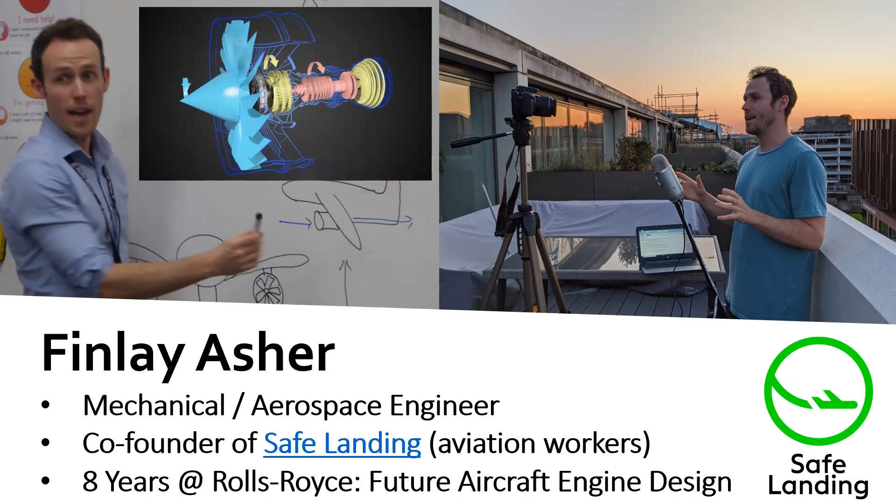To start with me, I'm Finlay, a mechanical and aerospace engineer. I've co-founded this group called Safe Landing, for aviation workers. Before that, I spent about 8 years working at Rolls-Royce on future aircraft engine design, so I've got a background on the technical aspects of what's required for better efficiency.

Started off on this first flying test bed of a carbon fiber fan blade engine at Rolls-Royce, and that's me at the front there with the engine on the test bed for the first time.

I then moved on to architecting the next generation of aircraft engines - an even bigger, really high bypass ratio ultrafan engine with a gearbox in it. That was meant to go to test in 2020 when I first worked on it. It's now on the test bed in 2023, and it still hasn't had its first run. That shows how technology can get delayed by quite a few years in aviation, despite our best plans.

I've also worked on future concepts. This is where airframers like Airbus or Boeing come to the aircraft engine manufacturer and say, we're designing a new program, a new airframe concept for 10, 15, 20 years time. We want engine manufacturers to develop concepts with us and produce bids for these future concept aircraft. I was in that job.

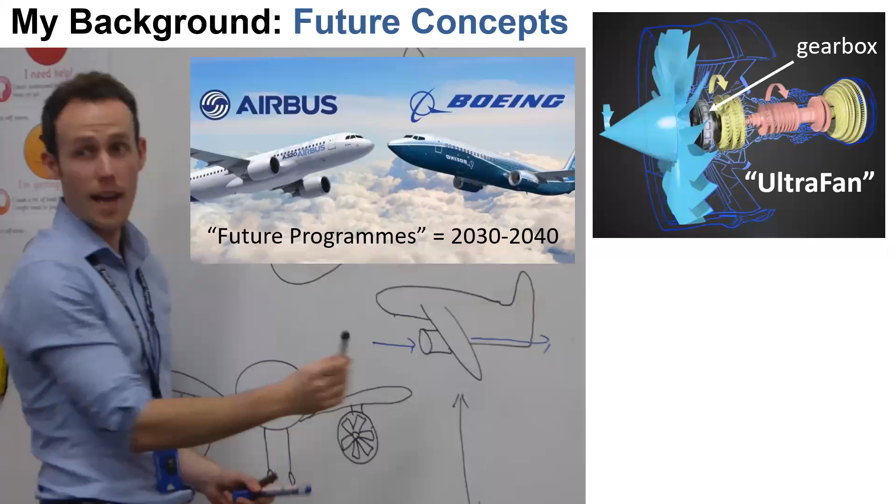Part of that was looking at the ultrafan, this very high bypass ratio engine with a gearbox in the middle that enables a really large fan and a really small turbine that spins a lot faster than the fan.

I was also looking at variable pitch fan blades - optimizing the angle of attack of all the fan blades rather than having a static set. This means you can really optimize a big bypass ratio engine for the difference between sea level and cruise, and also descent and climb. You can have an optimum geometry which changes your fan pressure ratio and enables larger bypass ratios, and can potentially remove the thrust reverser.

So I've worked on this kind of technology. What's interesting with the variable pitch fan is Rolls-Royce literally worked on this in the 1980s and haven't worked on it since.

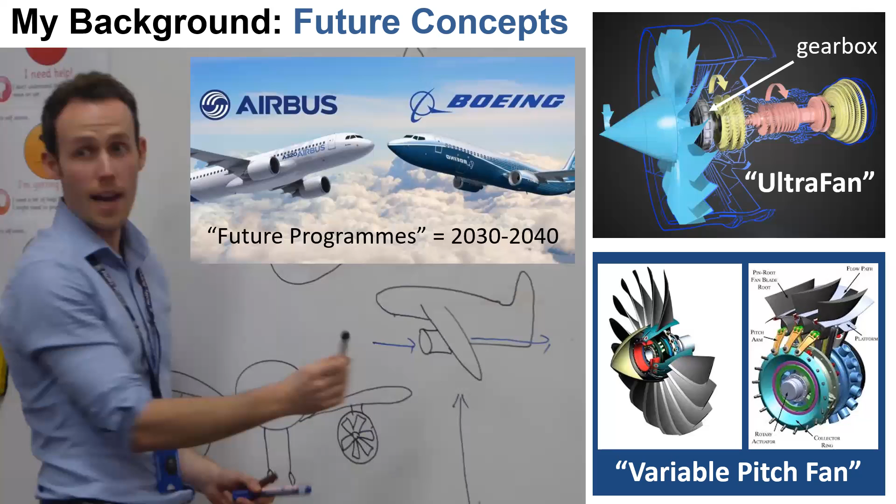And so why aren't we working on technology like that? Because there really wasn't that much resource going towards these advanced, more radical future concepts.

Now, a new engine development, a new aircraft development takes at least 15 years. And this is also not a radical concept, this is a relatively incremental improvement aircraft concept. So it takes about 2 to 3 years to architect it, 2 to 3 years to

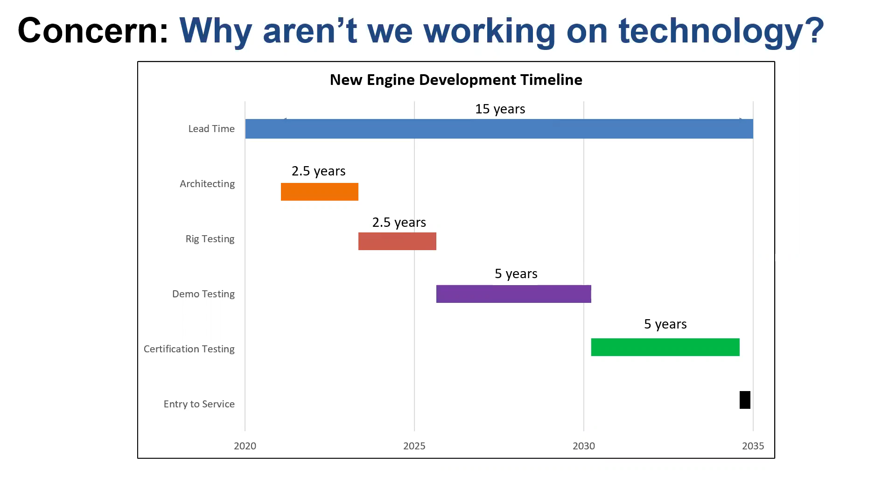do the rig testing of individual sub-elements of the system. Then you do about 5 years of demonstrator testing, trying, probably breaking and failing things before you get to your final design. And then once you have that, you take about 5 years to do all the certification testing, bird testing, water and ice, fan blade off, all of the performance testing, all of the life cycle testing takes about 5 years. So at the end of that, you're well past 15 years easily.

So the climate and ecological emergency is a this-decade issue. We could literally blow our budget for 1.5 degrees C in the next 10 years. So we don't have time even to do this. We should really be working on this as rapidly as possible, trying to minimize this time to get some new concepts in service, but we're not.

So why not? What I kind of realized as well is that, to go to the next step change of aircraft performance, you go to something called the open rotor. That gives you a significant step change, maybe like 20, 30% of fuel burn. It enables a really high bypass ratio, which is more aerodynamically efficient.

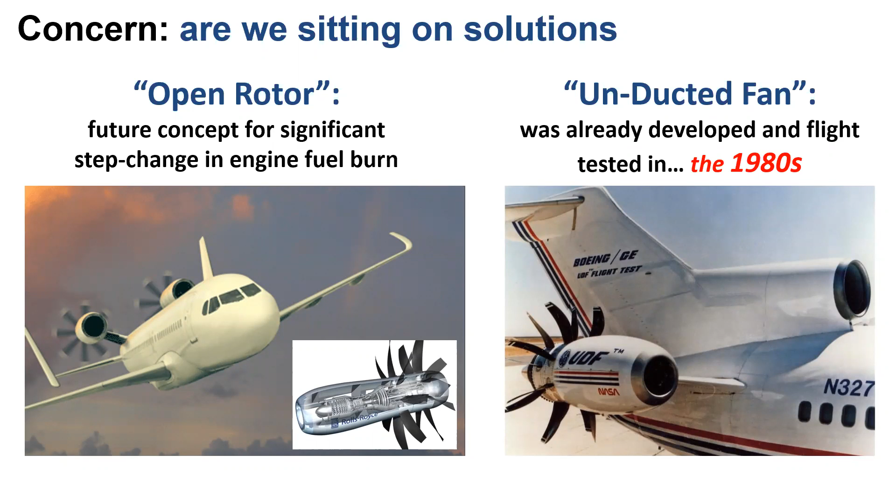But this concept has flown in the 1980s. It was developed and it's flown, and then it was discontinued in the 1990s. So why was that? Partly it's because there were technical challenges to do with noise and to do with the fan blade off, but those are solvable, right? And we're working on them again now.

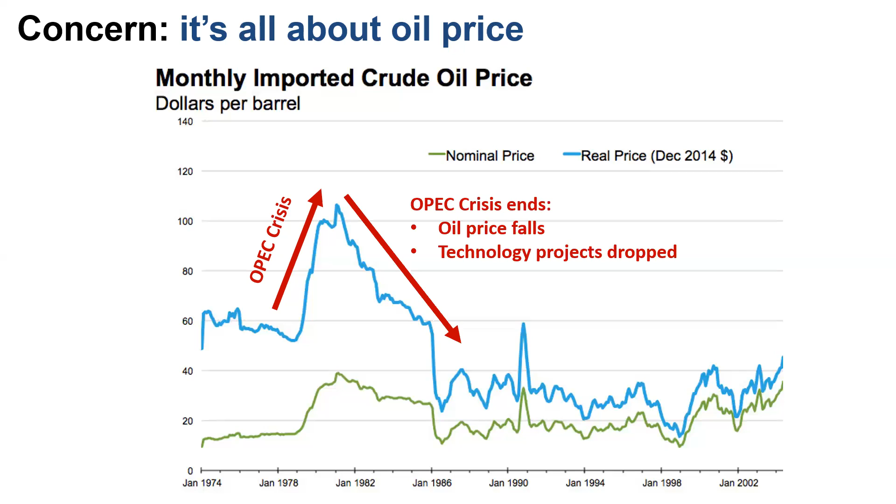The big thing was that in the 1970s, 1980s, there was something called the OPEC oil crisis, where lots of countries in the Middle East conspired to reduce the production of oil, and this sent the oil price really high. And it meant that lots of things happened, like in the US there was a speed limit on the roads, and there was suddenly development of wind turbines and solar panels, and we were developing these radical aircraft concepts. What then happened across the 1980s was the crisis ended, the oil price fell, and a lot of these technology projects were dropped. So you can see a low oil price really hinders innovation.

Then what happened in the early 2000s is climate change got back on the political agenda. We had Al Gore going to get into the US presidential election, talking about climate change as a really big issue. And that's when Airbus began their hydrogen studies in the early 2000s, which was kind of interesting. So 10 years later, Airbus had studied hydrogen aircraft for 10 years and developed this thing called the cryoplane. And in 2010, they announced: we're dropping it, too many technical challenges, it's not going to work, and we're going to just focus on scaling biofuels for the next decade, which didn't really happen either.

And also in 2020, Airbus were very keen on COVID bailout money and really wanted to show that they were going to do something sustainable to justify all of that public money being spent. So yeah, I think this is really crucial: environmental activism. In mid-2019, in the UK, Extinction Rebellion took to the streets and shut a lot of streets down in London. And suddenly all of the papers were talking about this. The UK government declared a climate emergency for the first time, and they updated their decarbonisation plans.

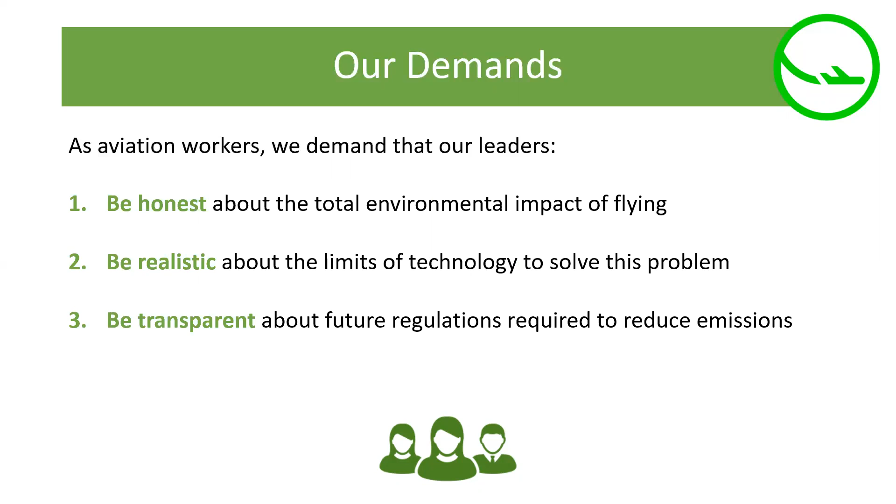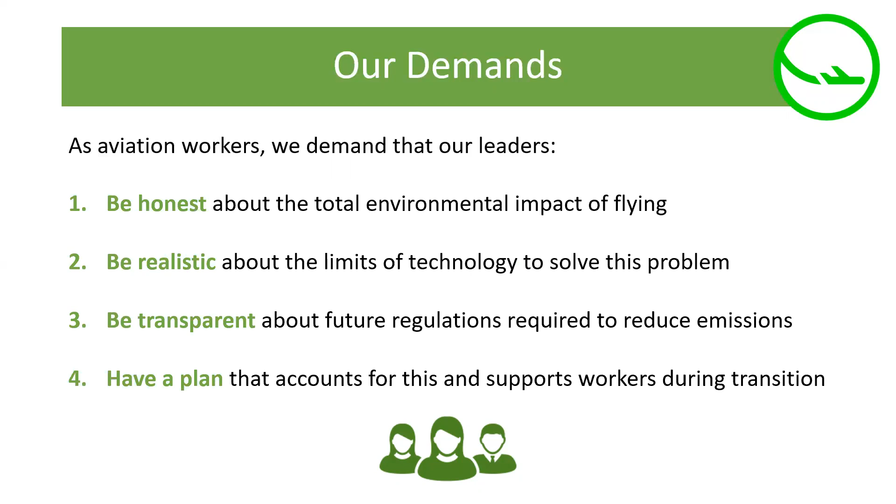These are our current demands that we've generated collectively. We demand that our leaders be honest about the total environmental impact of flying, be realistic about the limits of technology to solve this problem, be transparent about what future regulations are required to reduce emissions, and have a plan that accounts for this and supports workers during whatever transition is necessary. And that's not necessarily a transition out of sector, it's the transition of the aviation sector itself, and the nature of work changing, and the skills required for that.

Our positions: we believe that flying does have a high environmental impact and is currently highly inequitable, i.e. a lot of rich people fly. It has a lot of benefits to high income, high emitters, and a lot of impacts on low income, low emitters that never fly. This is really important because addressing inequity is a crucial part of the Paris Agreement.

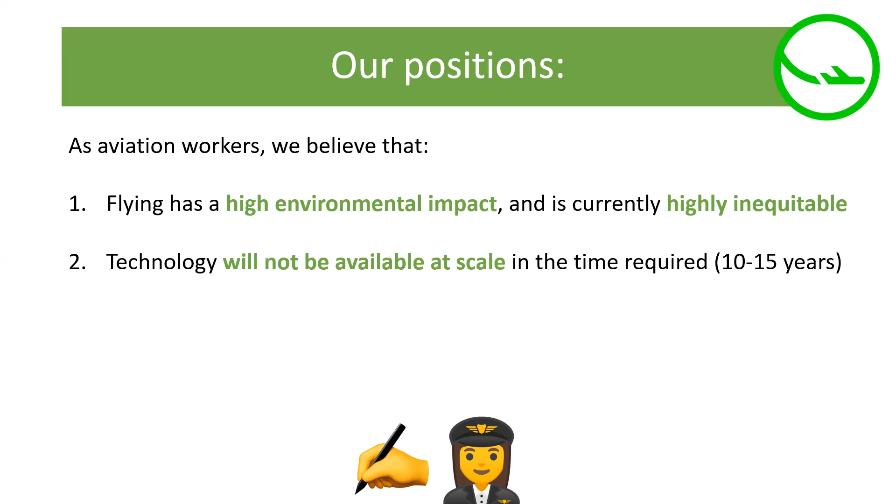Technology will not be available at scale in the time required. So we have 10, 15 years, possibly less than 10 years. And all of the technological solutions simply will not be ready at any significant scale in that timeline. We need to acknowledge that and then think, okay, what do we do instead?

Future regulations are vital, and this includes constraining air traffic capacity in order to reduce emissions. We should acknowledge this and then plan for it, because that's in all of our best interests: society, the natural world, and aviation workers.

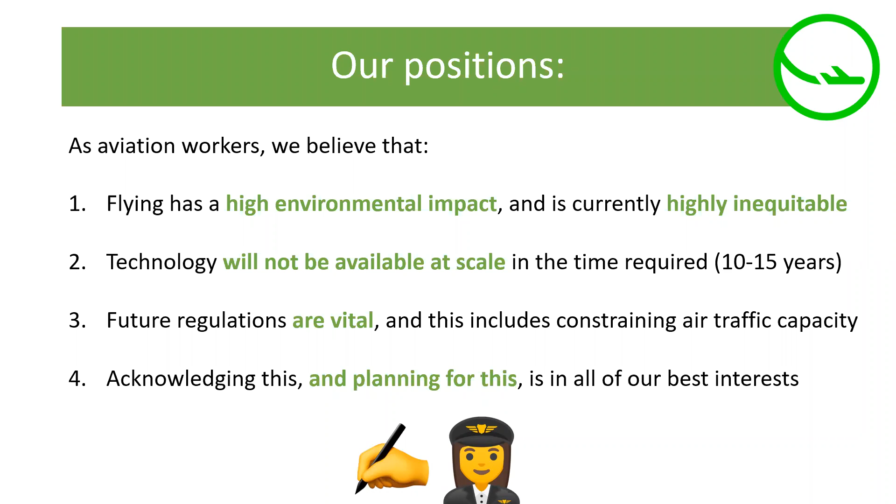So just on timescales, if we imagine the atmosphere is like a bucket, and whenever we put fossil fuels into the bucket, we're filling it up. And if we fill up that bucket to the brim, we blow our carbon budget, we exceed 1.5 degrees of global warming. Irreversible climate change is potentially upon us.

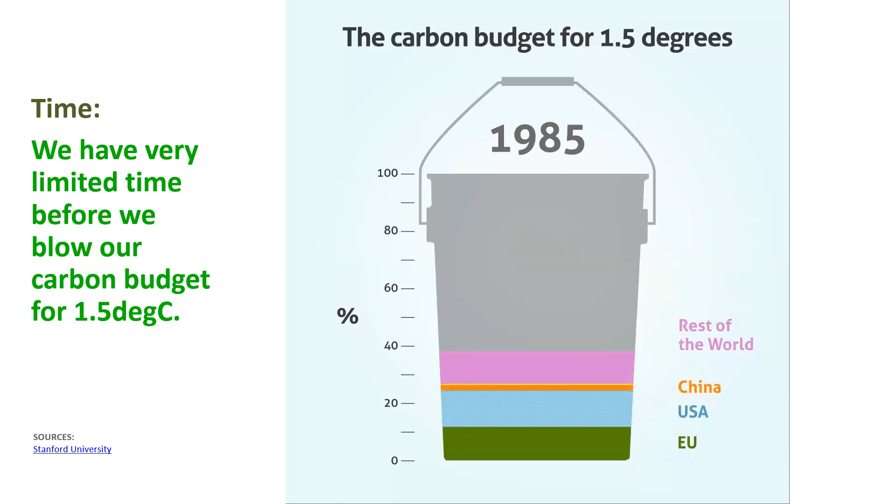We've obviously been putting carbon into the atmosphere since the Industrial Revolution, and every year we've been basically increasing the flow rate of emissions into the atmosphere. It's getting faster and faster, and we've now got only 8% of that budget left, less than 10 years. And that was back in 2020, so we're potentially down lower. That's the timescales that we have, less than 10 years.

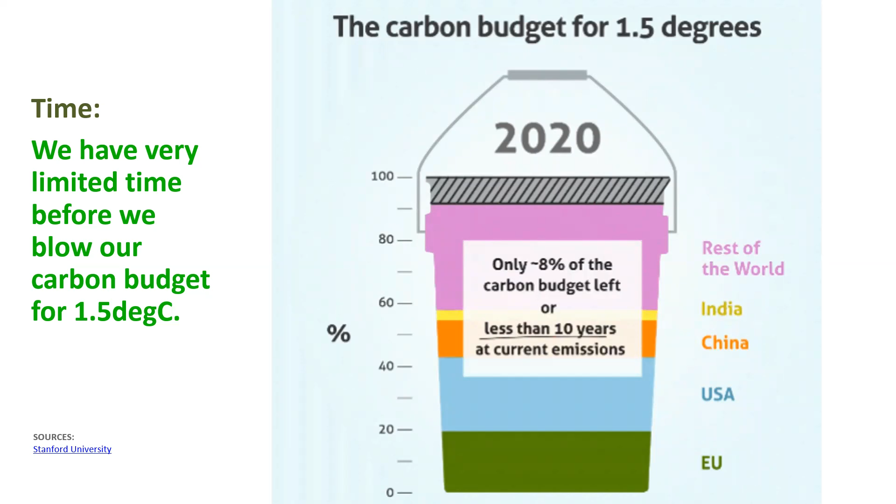So this is an emergency. This is not a case of, well, we can wait 20 years to scale up hydrogen or wait another 20 years for a new aircraft. We need to act. We needed to act 20 years ago. We can't wait another 5 years. It's such an urgent issue, and we really need to treat it like we're seeing the fire warning light in the cockpit. We don't just ignore it. We focus on it. We deal with it, and we create a plan with multiple options of addressing this.

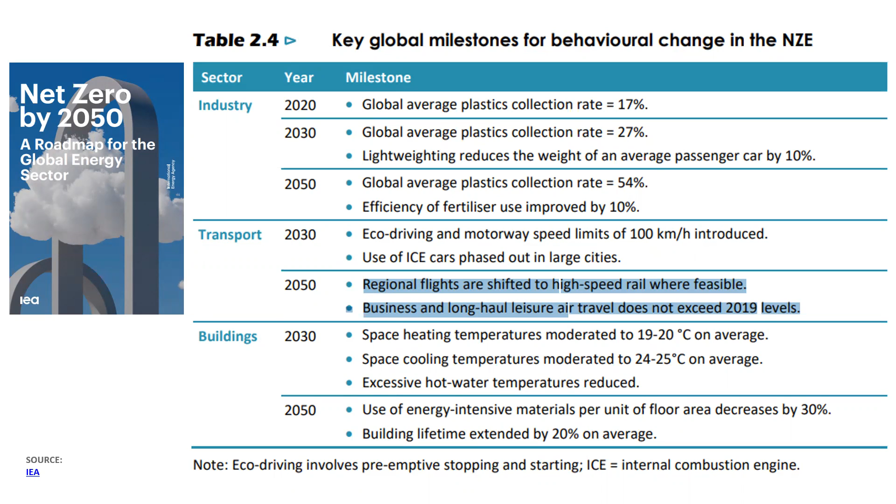So what do we mean by equitable? I'm going to cover that first, because I came to one of these talks a few weeks ago, and it was claimed that we need to keep on flying because that's really important for social justice and for developing economies, and because of how important air travel and tourism is for the economy. So let's just address that now. What do I mean by equity? This is really important.

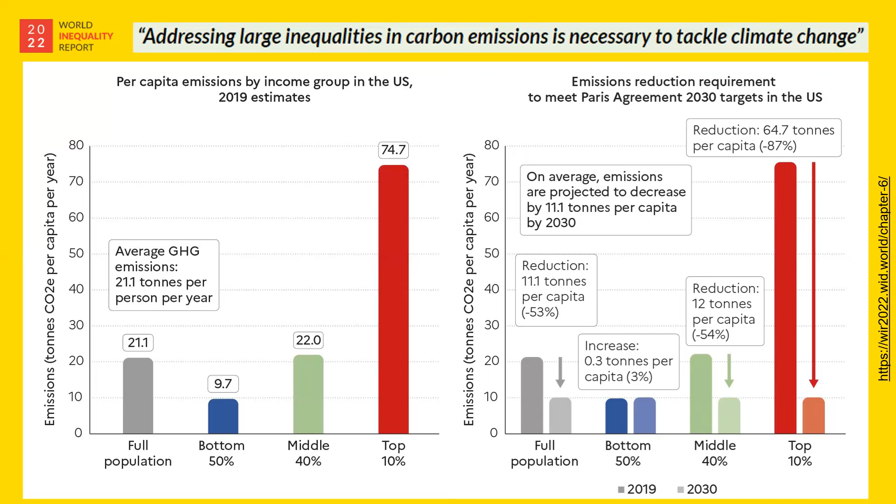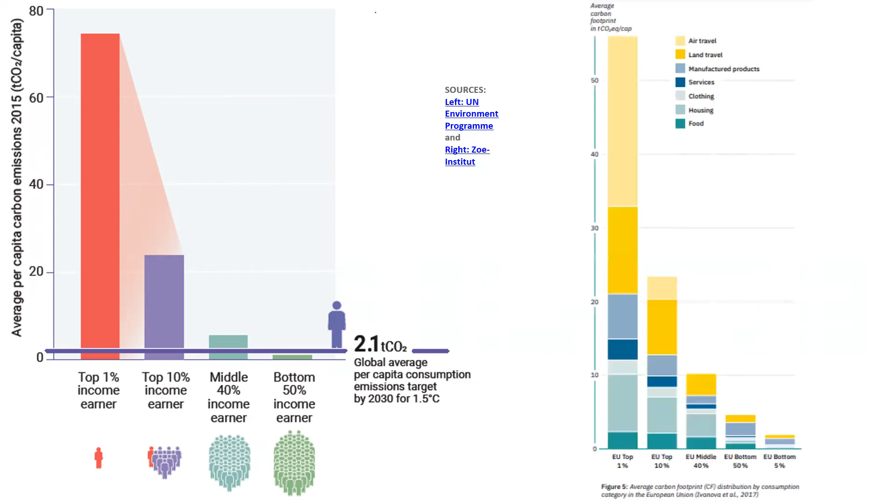The top 1% is even worse. We basically need to get down to 2 tons per person by 2030. And that's being blown massively by the top 1%. And obviously, if you fly one long haul flight, you can burn 2 tons of CO2 and blow your budget for the year.

If you look at the breakdown of where those emissions are coming from, the top 1% there in the EU, a lot of that's coming from air travel, and the top 10% is a big chunk from air travel. But the bottom 90% are virtually responsible for no aviation emissions. So in order to cut these people's budget down, we need to reduce car use and meat consumption and stuff. But air travel is a massive lever there.

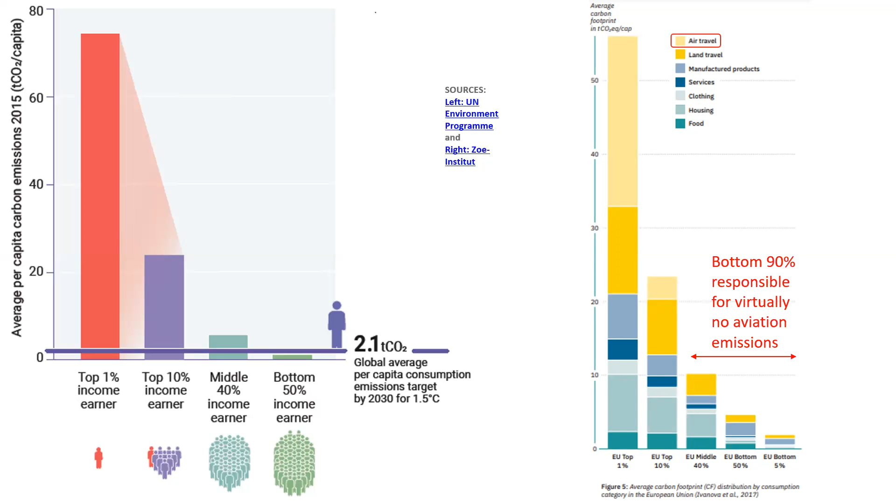So yeah, inequality of flying is really important. 1% of the population produce 50% of aviation emissions. 80% of the world have never been on an aircraft before.

Now you could say, well, actually, that's a bit unfair. What we need to do is expand aviation so that everyone in the world has access to air travel rather than limit it any further. So is aviation expansion a matter of social justice? I think this is really important before we get into any of the technology stuff.

So our position is air traffic growth can provide economic benefits. Obviously, being able to travel, being able to have tourists come in and out is good for the economy. However, aviation emissions also provide these massive climate risks. This is ecological, but it's also social. We might see mass migration, conflict, and economic risks, particularly if there's drought impacting crops, impacting water and food scarcity. There's huge economic impacts from storms and from severe weather events. Low-income countries face the highest risks, whereas it's high-income countries that fly the most.

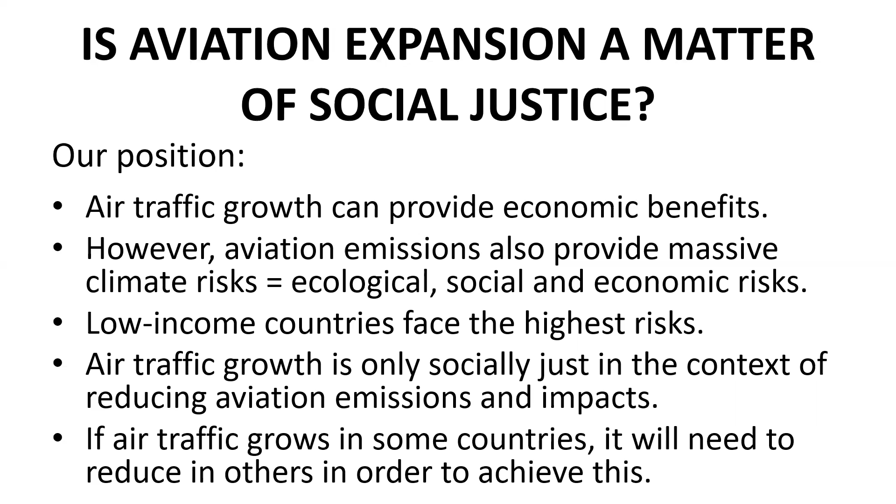Air traffic growth is only socially just in the context of reducing aviation emissions and impacts. So it's all very well flying to places to improve economics, but if the emissions are going up and causing much bigger damage, then it's clearly not socially just. So if air traffic does grow in some countries, for example, in Africa, where they fly a lot less, that necessitates that we fly less in global north countries, North America, Europe, China, etc., where we already fly far more than the global average in order to achieve that.

So if you think it's a matter of social justice, you probably should be against like a 3rd runway at Heathrow or expanding Los Angeles airport.

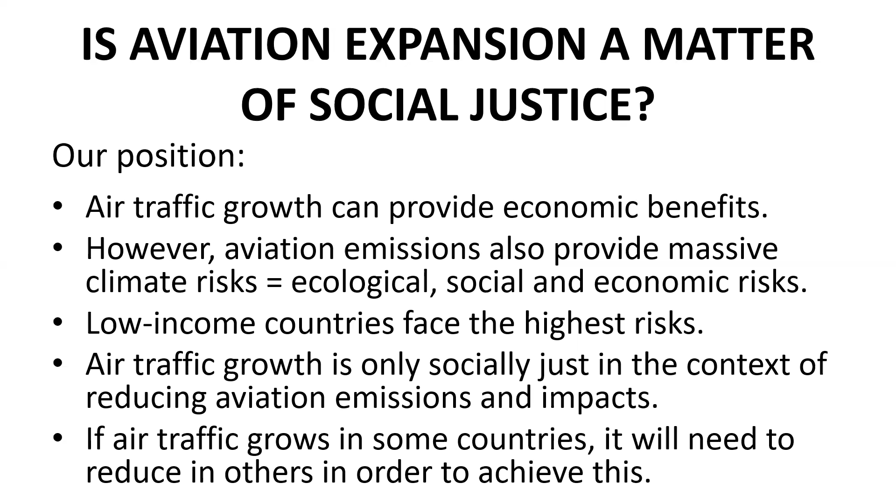Just to kind of recap on this as well, 1/3 of Pakistan was underwater last year. That caused billions and billions of damage. So we have to recognize that climate crisis has these massive economic impacts as well. And it's not in 2050, it's today, it's already. And this is a big injustice. So we can only say that aviation is providing social impacts if we reduce emissions.

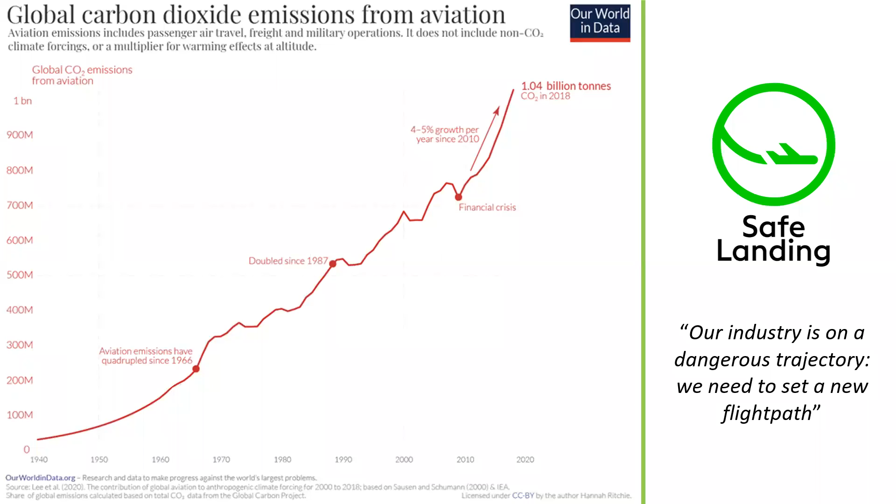So what are we doing with emissions? Well, this is the last 50 years of aviation emissions, and CO2 has just been increasing almost exponentially. And what we're saying as Safe Landing is this is going in the wrong direction. Our industry's on a dangerous trajectory, and we need to set a new flight path. We need to grab the controls and we need to move this in a different direction.

However, the industry doesn't want to do that. It justifies this continued expansion using what we call a sustainability playbook of narratives that it uses to justify the growth. And it kind of starts off like this. Firstly, play down the size of the problem. You probably heard this a lot, right? Like aviation is only 3% of CO2 emissions.

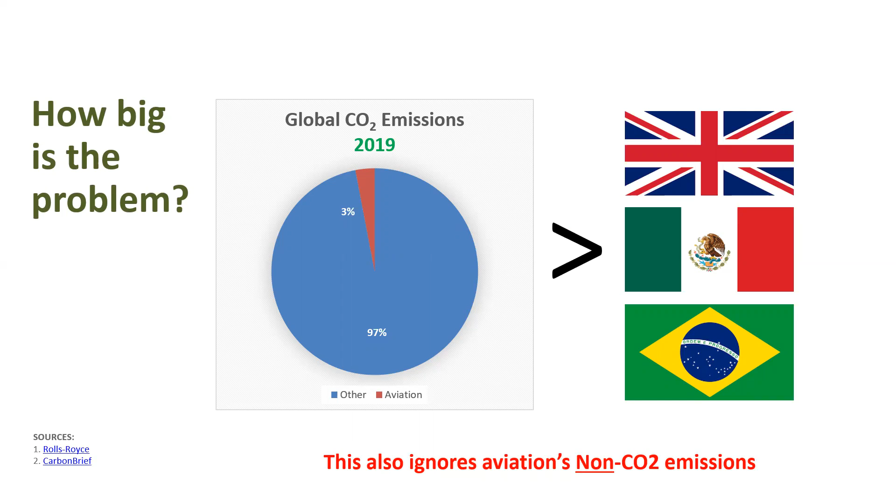Firstly, 3% is a massive amount of emissions. It's more than the entire country of United Kingdom, of Mexico, of Brazil. And the other thing is it's on this growth trajectory, so it's estimated that by 2050, aviation will consume a quarter of the CO2 budget because other sectors are decarbonising.

This also ignores the non-CO2 emissions, which are estimated to be two-thirds of aviation's total climate impact. So if you look at that budget, we've got less than 10 years, maybe you need to reduce that to 3 years because we're not dealing with the impact of contrails, NOx, etc., that are also causing global warming. There are things we can do in the short term to mitigate these, but we're currently not doing them, so we probably should reduce the budget further.

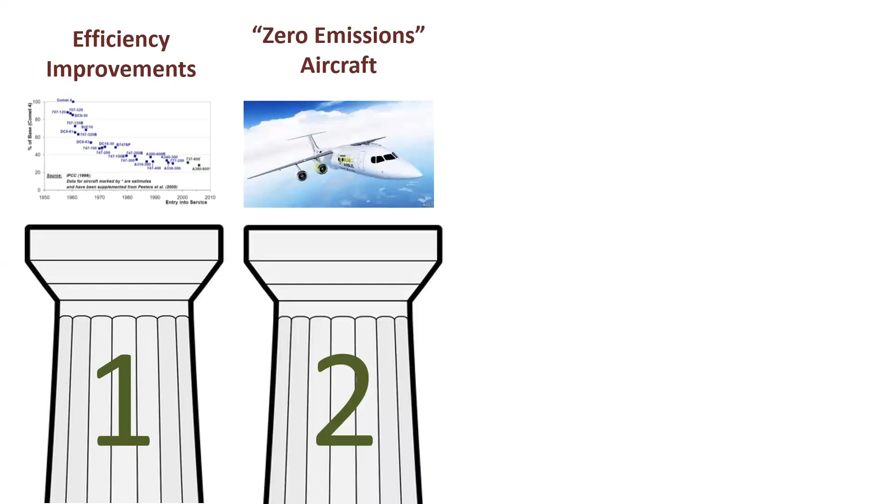So next, we get on to the techno and policy solutions that the industry is claiming will solve the problem. First of these is efficiency improvements, then there's zero emissions aircraft, then we've got sustainable aviation fuels, and then we've got carbon offsetting. I'm going to go through these one at a time, starting with efficiency improvements.

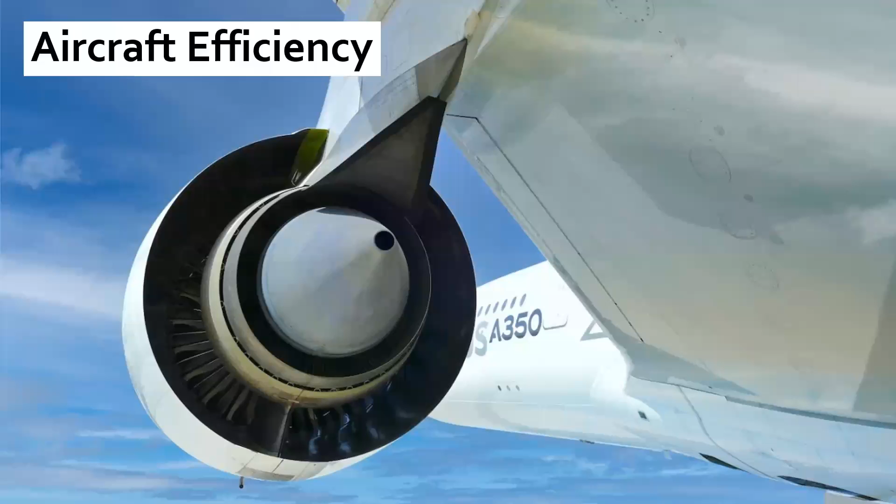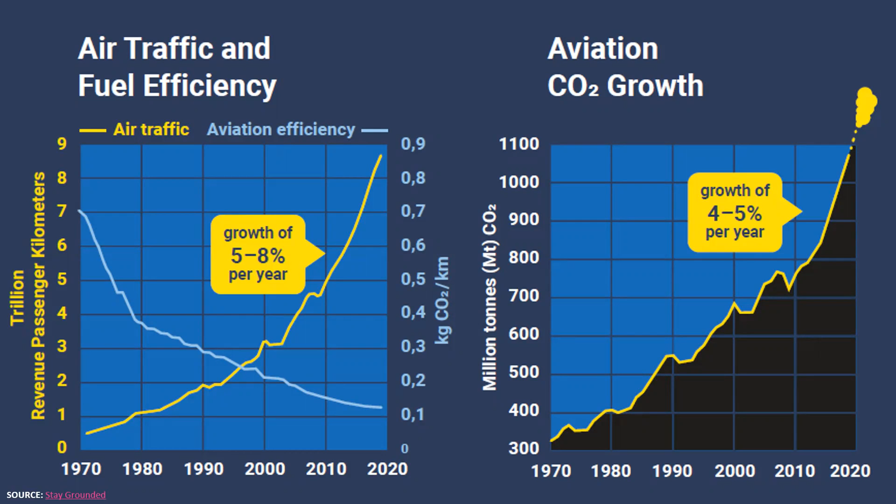Efficiency improvements, you could argue, are abating some of those emissions, but actually you're making it cheaper to fly. And what we find is the Jevons paradox means that as it becomes more efficient and cheaper to fly, people fly more, and actually you increase emissions more. Aircraft efficiency has historically led to emissions increasing, not decreasing. So just by logic, this will continue into the future unless we constrain air traffic growth.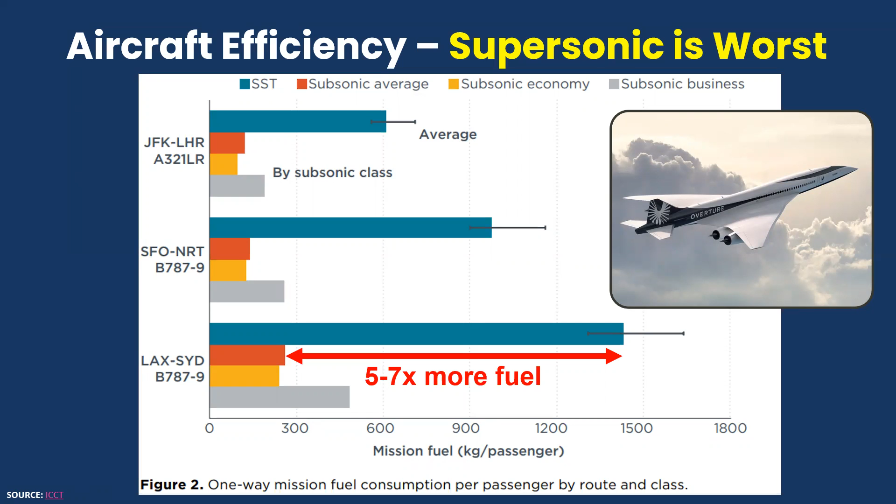Just to make a point here, we should be producing the most efficient aircraft we can, but my company was working on supersonic with Boom, and supersonic can consume 5 to 7 times the amount of fuel that subsonic does. So we're not even going in the right direction of putting our engineers to best effort, like working on more efficient, slower aircraft. We're literally designing more inefficient aircraft that can transport a very tiny elite minority of people.

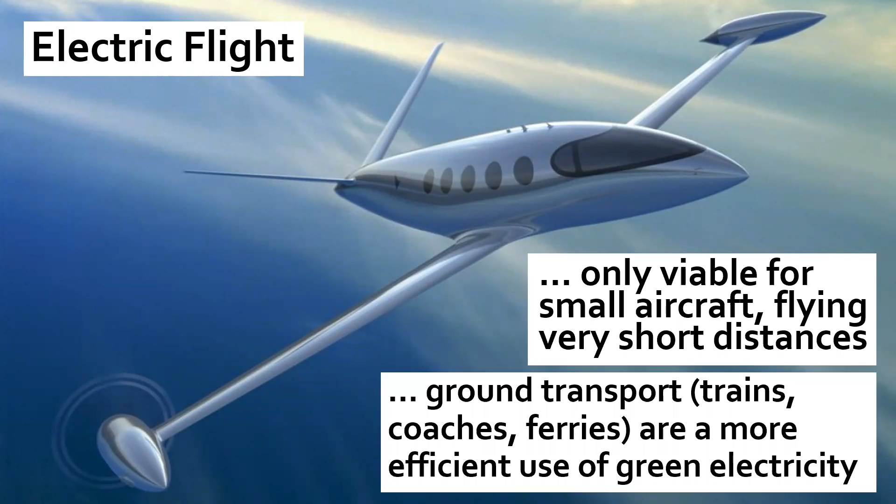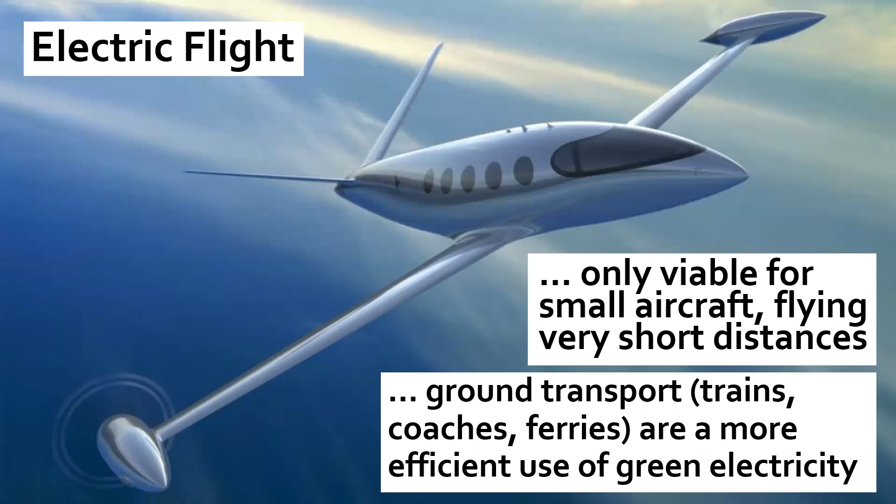This is because batteries and electric motors are really heavy, along with other electrical power systems. 1 kilogram of fuel kind of equates to 25 kilograms of batteries - actually it's more like 50 kilograms, but then an electric motor is more efficient, so you cut that down. Still, your weight and volume is a massive disadvantage. Also, when you discharge a battery the weight stays, whereas when you burn jet fuel off, the aircraft becomes more efficient. So there are multiple things that mean electric aircraft are really constrained in what they're going to be able to do in the short term.

We're going to see some small aircraft, but they're not going to reduce aviation emissions. Now, the absolute worst here is electrical vertical takeoff and landing. With electric aircraft, this is the least efficient way you can fly, but counterproductively, this is the area that's getting the most funding and venture capitalist investment, which we are not particularly big fans of.

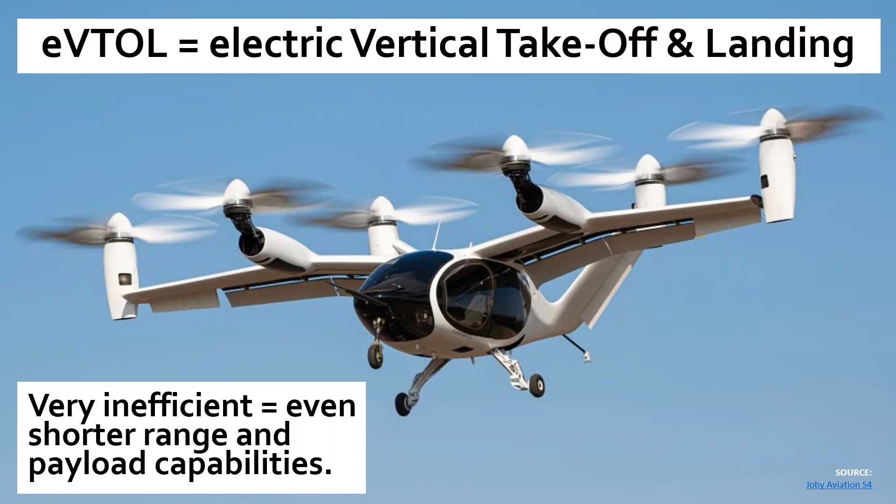We think that electric aircraft should be designed for maximum efficiency, more like fixed wing, minimum energy per passenger mile. This doesn't do it - very inefficient because of the vertical takeoff capability, and then even in forward flight, they're not optimized for maximum aerodynamics. So, hydrogen flight.

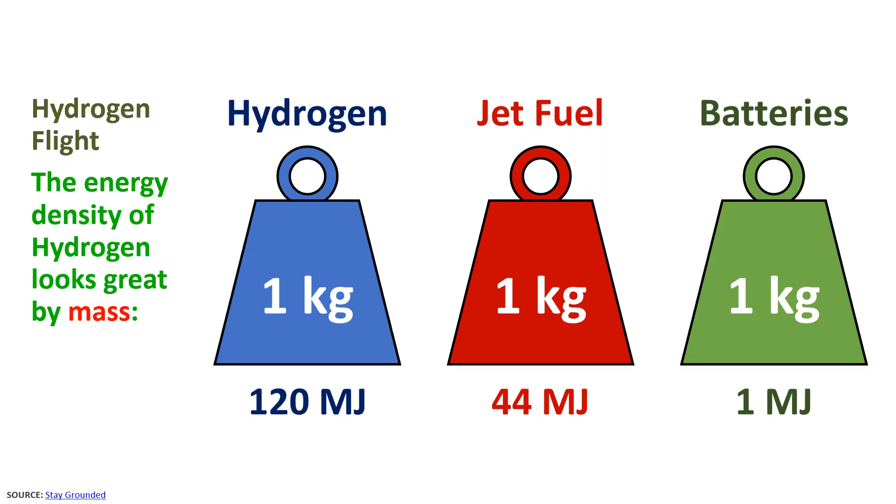The hydrogen aircraft tend to look a bit different from conventional aircraft. Now, hydrogen kind of looks good when you look at the mass. It's like, where jet fuel is 50 times better than batteries, hydrogen is 3 times better than jet fuel on mass, which is good.

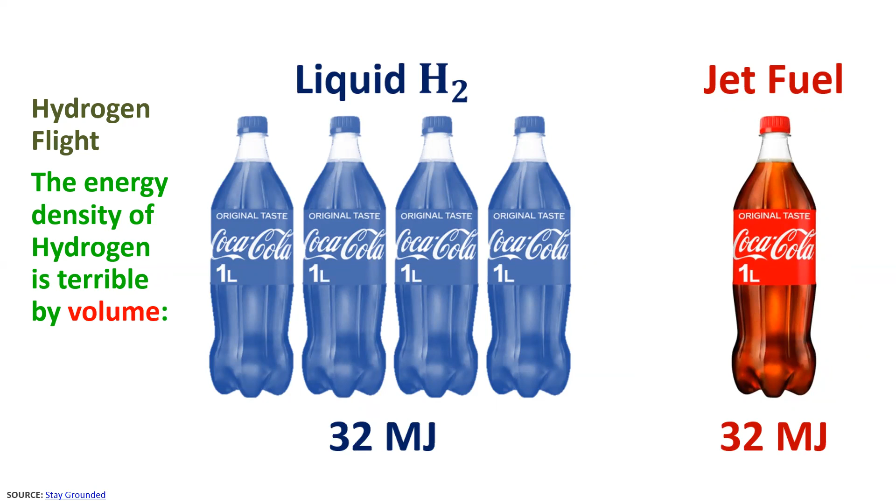However, the volume for the same energy is a quarter of jet fuel's energy within the same volume, which means you need 4 times the volume. That's liquid hydrogen cooled to cryogenic temperatures compared to jet fuel.

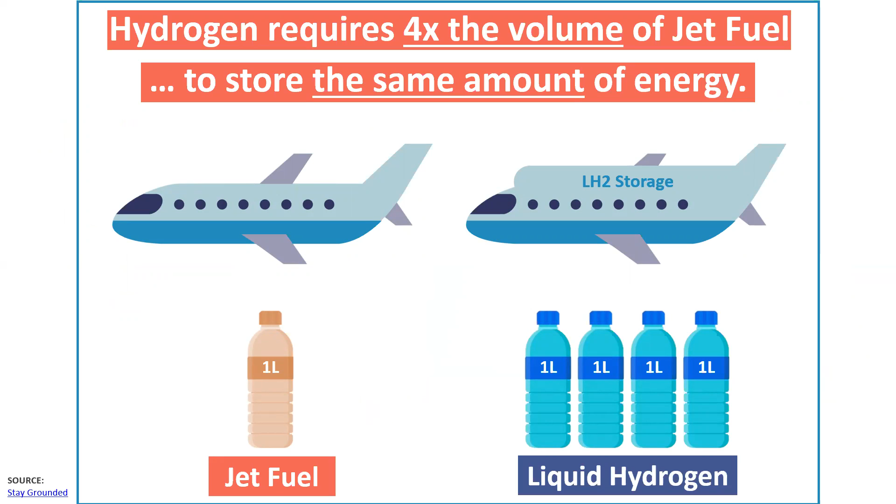So if you require 4 times the volume, you end up with an aircraft that is a lot bulkier than jet fuel. This can mean a couple of things: either you increase the aircraft size, increasing drag and weight, making it less efficient, or you keep the same aircraft size but get rid of passengers to put hydrogen in the fuselage. It can't fit in the wings because of the shape of the tanks.

That means you need to redesign the wings, along with redesigning the combustion system, which means we're really looking at 15 to 20 years before we get anything similar in size to current conventional aircraft. We will see some hydrogen aircraft in the next 10 years, but they're likely to be smaller turboprop regional aircraft.

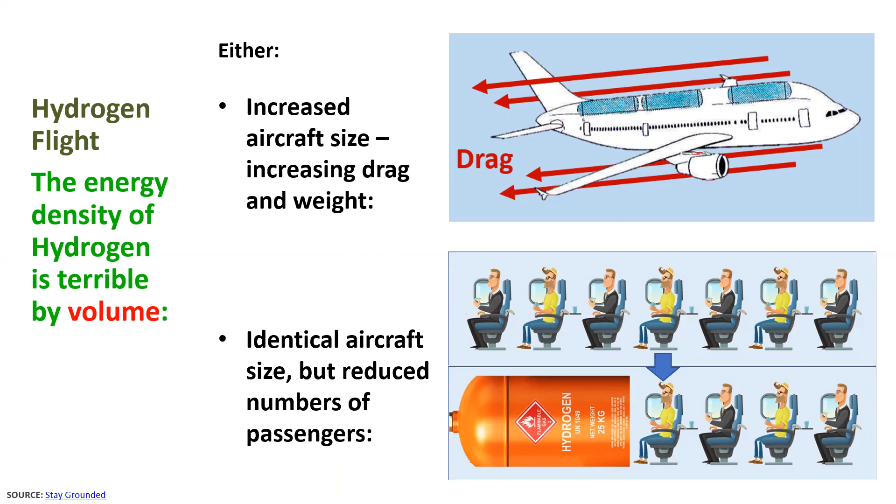So volume is the big killer. In general, it's likely to be viable for medium aircraft, more likely regional in the short term, flying medium distances, and likely to take 15 to 20 years to develop and certify the first aircraft.

If we go down this route, there's also likely to be issues because it's quite a different technology. We're probably going to get things wrong and that will delay things. It also requires very different aircraft, airports, and very large amounts of energy, which I'll get onto when I talk about e-fuels, because the amount of renewable energy required is massive.

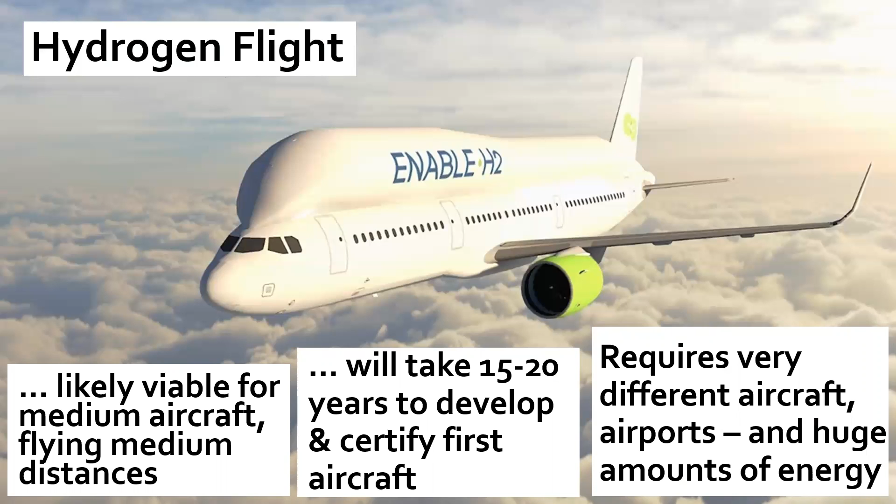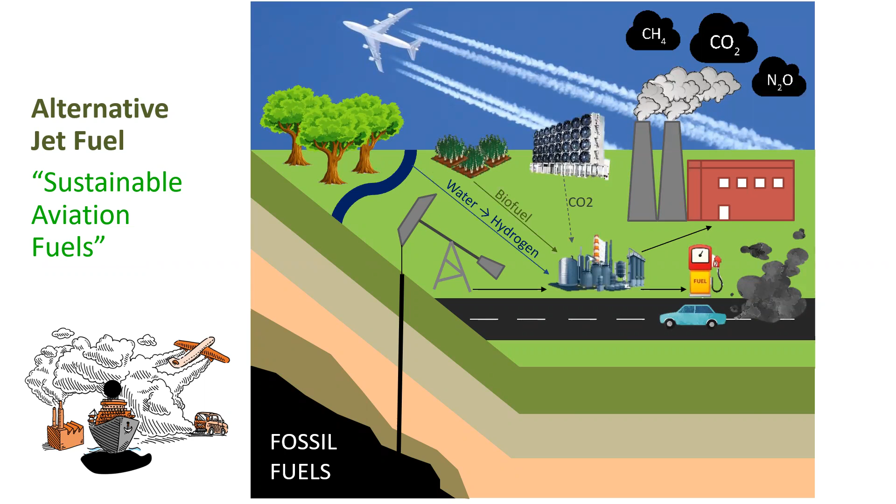So, alternative jet fuels, sustainable aviation fuel - you see these called SAF. The idea is that rather than extracting carbon from fossil fuels stored deep underground, which is then emitted into the atmosphere increasing global warming when you burn them, we take carbon that's already in the atmosphere - either in biofuel, biomass, or we electrolyze water to hydrogen, or capture carbon from the air - and combine those things using renewable energy, giving us a closed loop system.

Now, it's worth noting we've been talking about this for decades already. Back in 2008, we promised there would be 10% alternative fuels by 2017. That target has been revised down as we go, and now the EU has just announced a mandate for 6% by 2030, which is obviously not a big amount. And these things aren't necessarily environmental either.

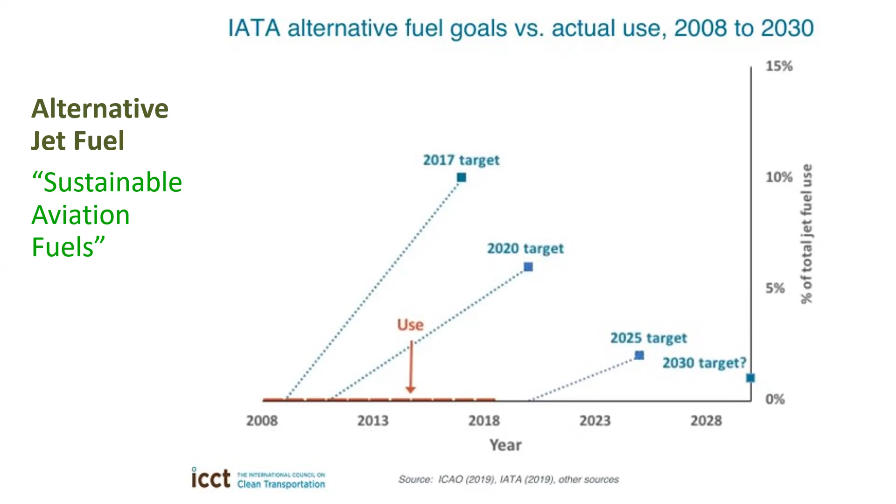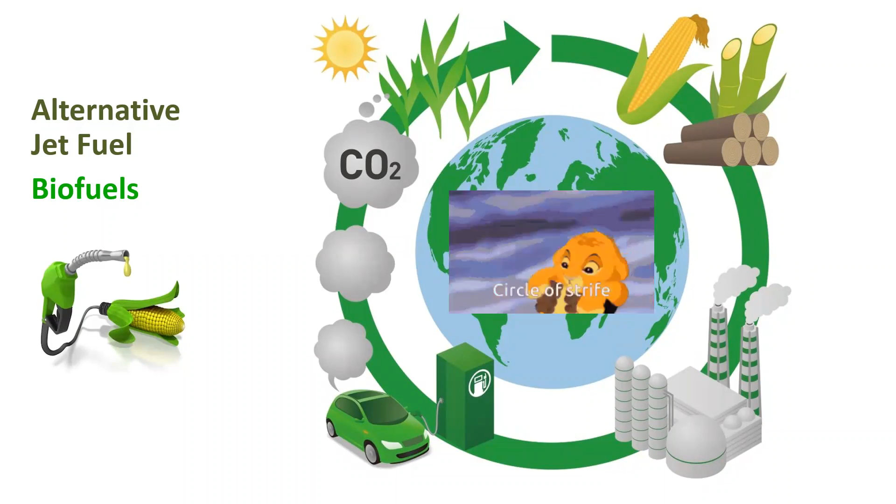So let's take a look at them - biofuels first. This is meant to be a nice closed loop cycle, all green and natural, the circle of life. I'd say actually this is the circle of strife. Biofuels are very dangerous, and it's really important that we're critical of these as aviation workers, and critique the sustainability of some of these feedstocks.

Fuel from crops - rapeseed, soy, particularly palm oil - have emissions that are actually much higher than fossil fuels, because there's land use change leading to deforestation and draining of peat bogs. The emissions produced are actually worse than fossil fuels.

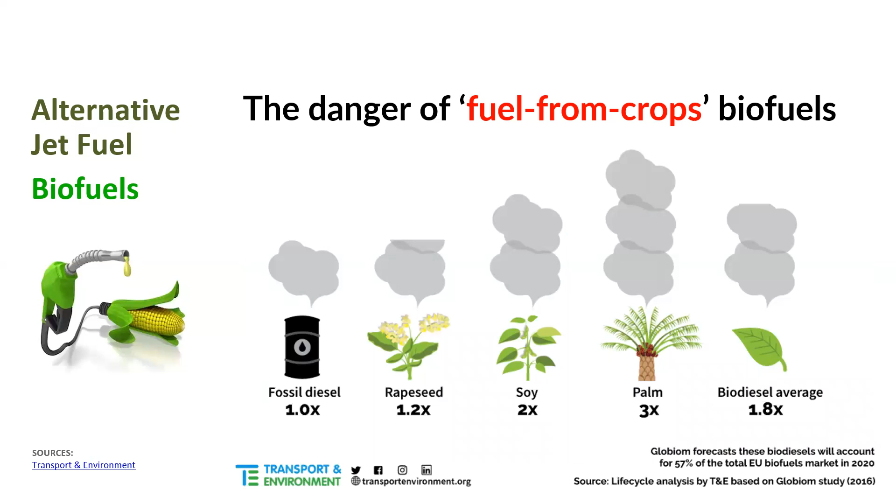Now, the industry is saying it's not going to produce SAF from crops. However, we've done some work helping a human rights group in Paraguay, where the biggest SAF refinery is being built in the Southern Hemisphere. It's being built in the Chaco region of Paraguay, which is suffering one of the highest rates of deforestation anywhere in the world. That's all soy production for cattle, and then waste soy oil and animal fat from the cattle is being used for this sustainable aviation fuel refinery.

So yeah, there are more instances of this around the world where these crops are sneaking in as apparent waste. So can fuel from waste scale instead? We've got sawdust and bark from forestry, animal byproducts, and agricultural waste from farms.

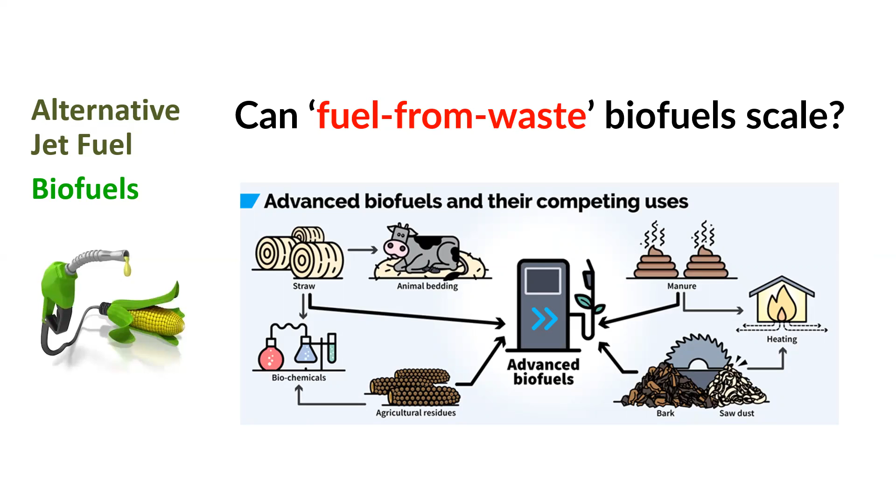Can we use these? The thing is there's competing uses for a lot of this stuff, and that's what's really important. There's only so much waste that's available too. Transport & Environment say that maybe we could reach like 10% biofuels by 2050, so that's nowhere near the demand we're expecting.

The other thing about those biofuels is there's competing uses. We need non-fossil fuel fertilizer. We need bioenergy carbon capture and storage for negative emissions and to help the grid balance renewable energy. We need road transport fuels in shipping and trucking, and cars that aren't going to be able to switch to electric over the next 15, 20 years. There's a lot of liquid fuel still required in ground transport, shipping fuels, bioplastics, and there's a real lack of cross-sector analysis to see how much have we got and which other sectors need it.

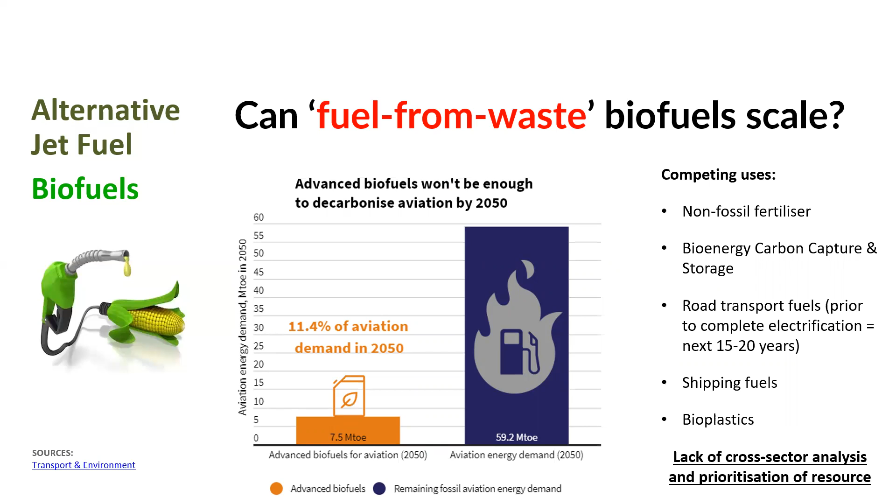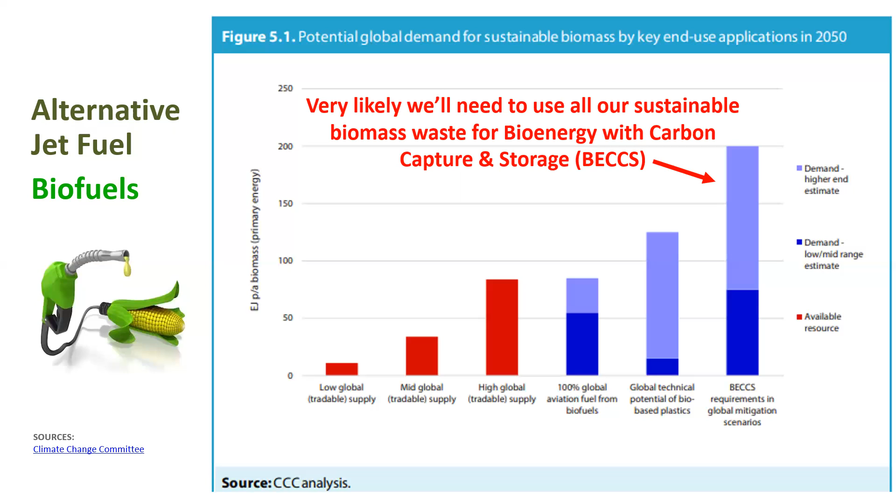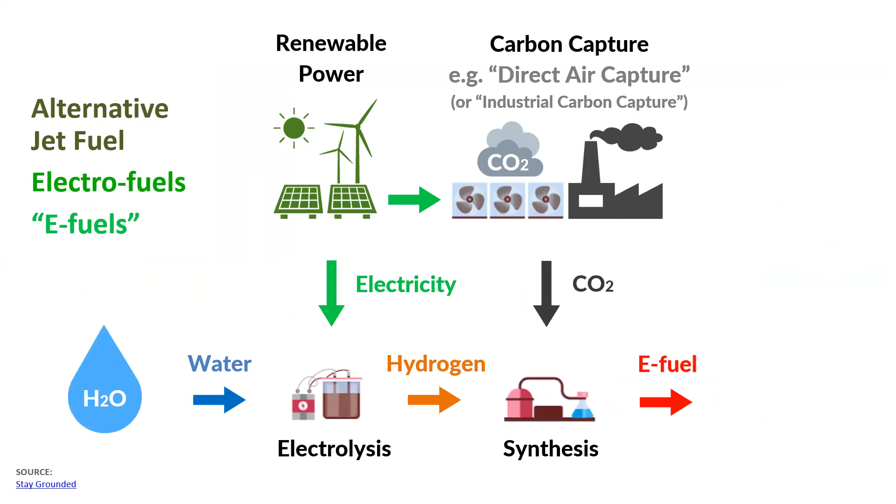Okay, so what about electrofuels? The idea is: you've got water, you electrolyze it using renewable electricity, and you get hydrogen. You then power direct air capture, and you combine hydrogen with carbon, and you get a liquid hydrocarbon. Burn that in the aircraft, that emits CO2, and you recapture it again in this cycle. Of course, you don't recapture the non-CO2 emissions. So the thing about this is just how ridiculously energy intensive it is.

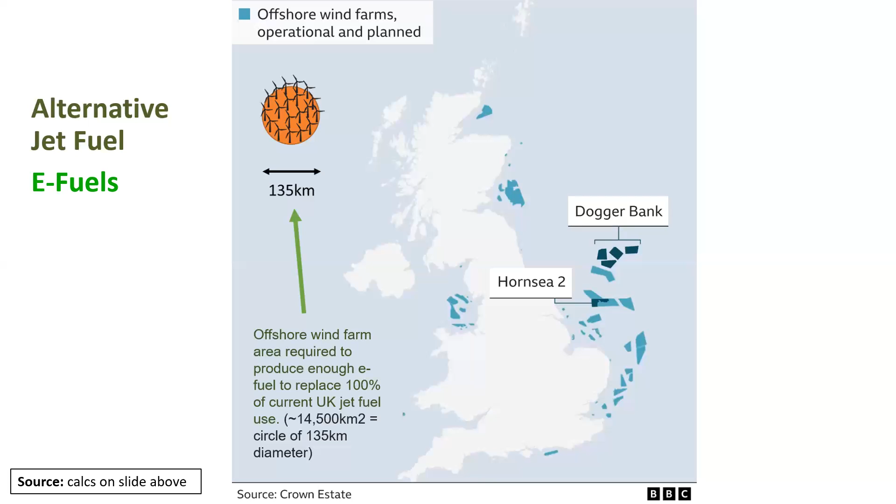So why is this? Basically, we used 12 million tonnes of jet fuel in the UK in 2018. To produce that in e-fuel, that's about 140, 150 terawatt hours. And the e-fuel process is quite inefficient. I've used a 45% efficiency, which is about in the middle, so you need 300 and something terawatt hours. Now that might not mean much to you, but the current grid generation capacity in the UK for everything is 330 terawatt hours. So basically you'd need the entire grid.

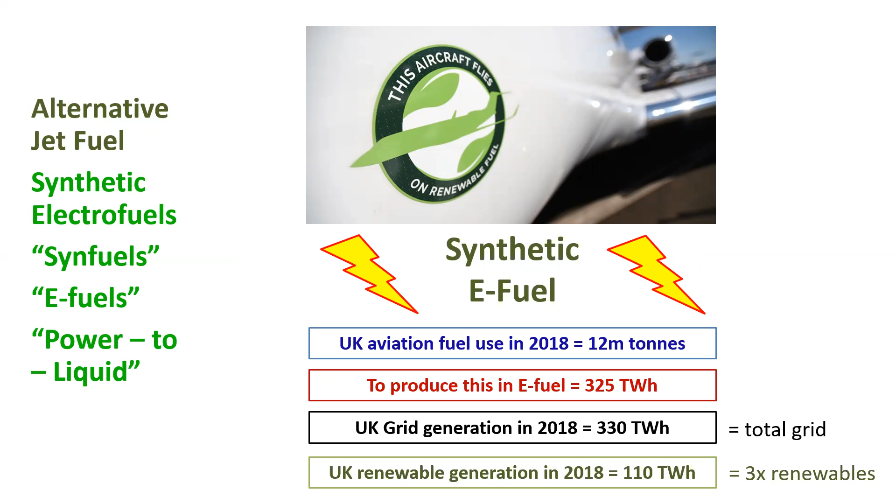And renewable generation in that is 110. So you need 3 times renewable generation just for aviation without any growth.

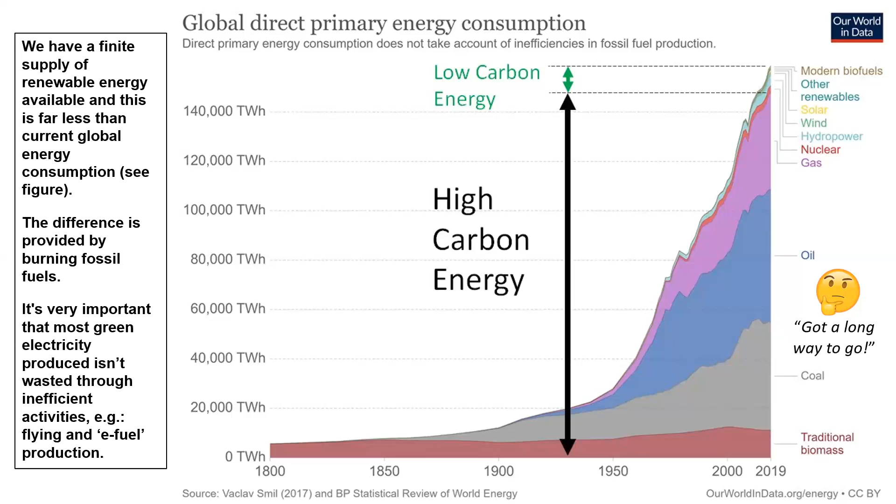Now, the problem is just taking a step back and looking at total human energy use. This is what it was in 2019. We've got biomass, coal, oil, gas, and then nuclear is the tiny red bit. Wind and solar is like 1% and 2% each. So we're far, far away from decarbonising existing energy use with renewables. It feels like we've got a lot of renewable growth, but we're so far off. And what we will do if we add these energy intensive processes is we will just extend how long it takes to get off of fossil fuels. So we've got a finite supply of renewables, and if we increase our energy consumption, we'll just burn more fossil fuels. So it's really important we don't waste our renewable energy with inefficient activities.

So final thing on this list, carbon offsetting. I think you all know what this is.

It's saying I'm going to keep on increasing my emissions, but I'm going to pay somebody else, usually in the global south, to reduce theirs. Before I even get into this, I think carbon offsetting is fundamentally flawed. This is admitted by the sector - the CEO of United Airlines has said even if we covered the entire planet in trees, this would only offset 5 months of current emissions. And then we'd have no land left for human habitation, biodiversity, and farming our food. So there simply isn't enough space on the planet to do this.

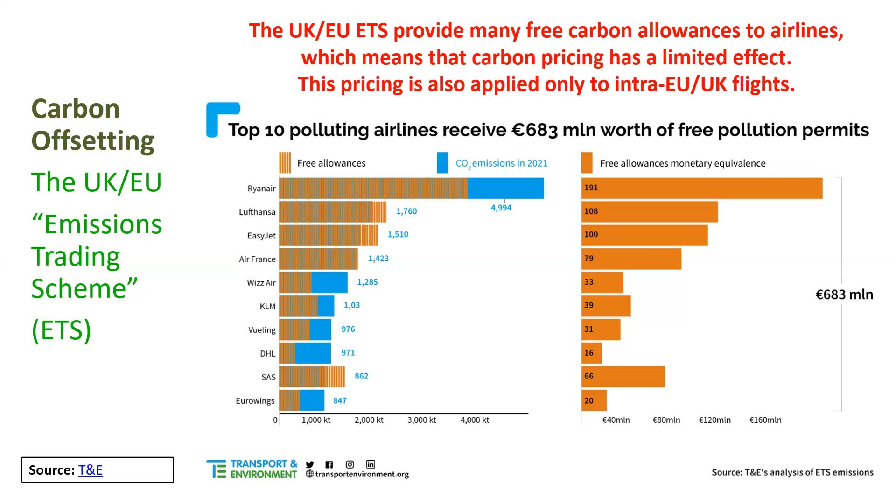There's a couple of schemes. There's the ETS, emissions trading scheme, in the EU and UK now. Problem with this is there's free allowances for all the airlines, so a lot of them don't actually pay that much. However, that's actually quite a lot better than the international carbon offsetting and reduction scheme for aviation, or CORSIA. This is a really weak policy that covers international aviation emissions, which are the majority of aviation emissions.

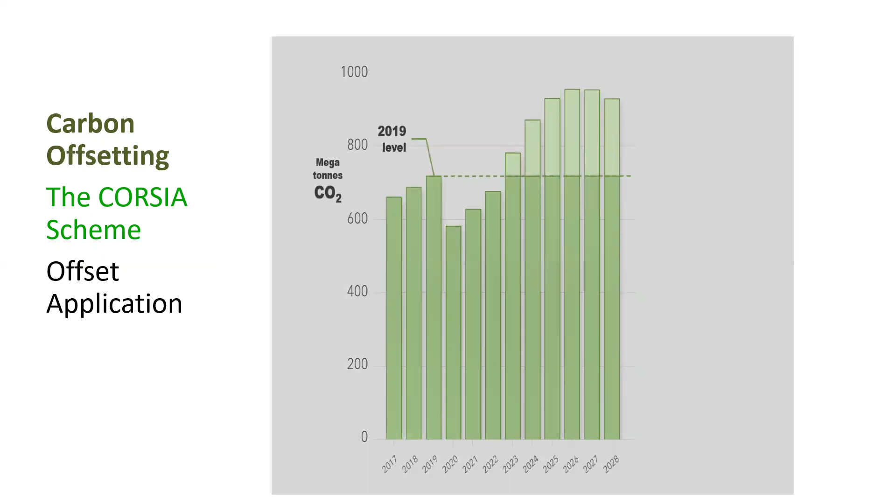The problem is it only offsets emissions - and offsetting doesn't work anyway - but it only applies to emissions beyond 2019 levels. We've had COVID the past few years and haven't even been above that level, so nothing's being paid for. After that, only emissions above that level are offset, nothing below. So most CO2 emissions aren't covered. And non-CO2 emissions, which are two-thirds of the climate impact, aren't accounted for at all within either scheme. So the majority of emissions are going unpriced.

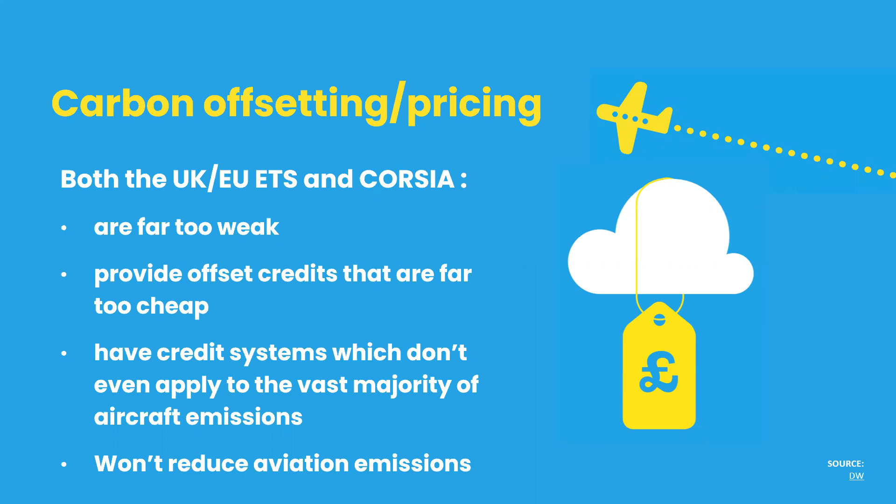Those prices themselves are super low, less than $10 per ton of CO2, whereas carbon capture costs more like $1,000 at the moment. So the real cost of industrial carbon capture is far higher, and it's just not being paid for. This is going to have to change. So basically, offsetting is too weak, doesn't apply to most emissions, and it's just ineffective.

Just a bit on negative emissions - super high risk as well, very energy intensive, relying on biomass or renewable electricity again, and we just don't have the resource for this either. But either way, they're going to be very, very expensive, and this is going to have an impact on the cost of flying, and therefore how we need to change how we fly.

I'm going to skip through this. So what I think we need to do is challenge false solutions like this, greenwash, and say what it is, demand real solutions instead - policies, form citizen-led and worker-led movements to push for those policies, and prepare ourselves for change, adaptation. So what policies do we think are required?

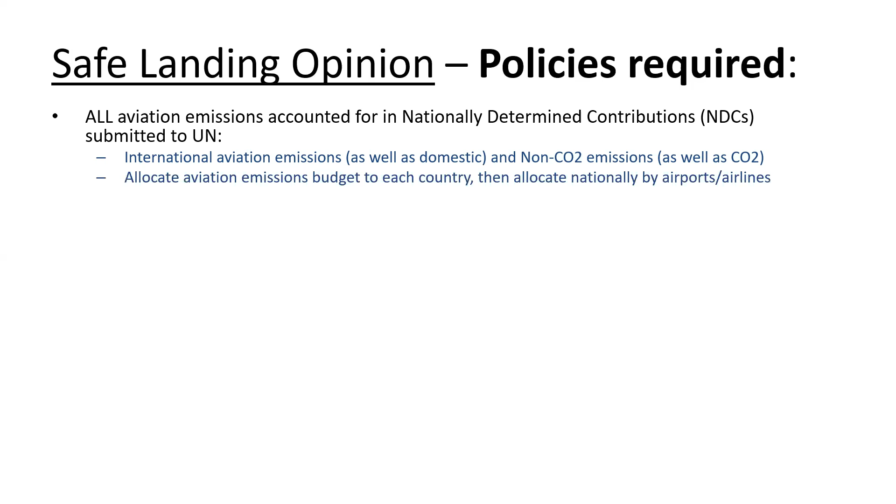Safe landing opinion: I think all aviation emissions should be accounted for in these NDCs submitted to the UN. That should include international as well as domestic emissions, non-CO2 as well as CO2. We need to allocate - this is like a budget problem - a budget to each country for aviation, and then allocate that nationally between airports and airlines so we know we're operating within a safe budget.

There's probably going to need to be pricing of emissions, like a jet fuel tax. We need a clear roadmap of how that price increases over the next few decades, and it needs to be a realistic number proportional to the cost of negative emissions, hydrogen, and sustainable aviation fuel. We need progressive policies, ideally like a frequent flyer levy that improves equity - meaning higher income, higher emitter, frequent flyers pay more.

Technology: if there's more pricing, there's probably going to be more rapid development of efficient aircraft, phasing out of older aircraft. Aircraft and air transport networks should be designed for minimum energy use and fuel burn. Probably going to be flying less fast, less far, less frequently. On fuels, there should be low use of aviation biofuels, no bioenergy from crops, and bioenergy from waste probably needs to be prioritized for fertilizer and other uses.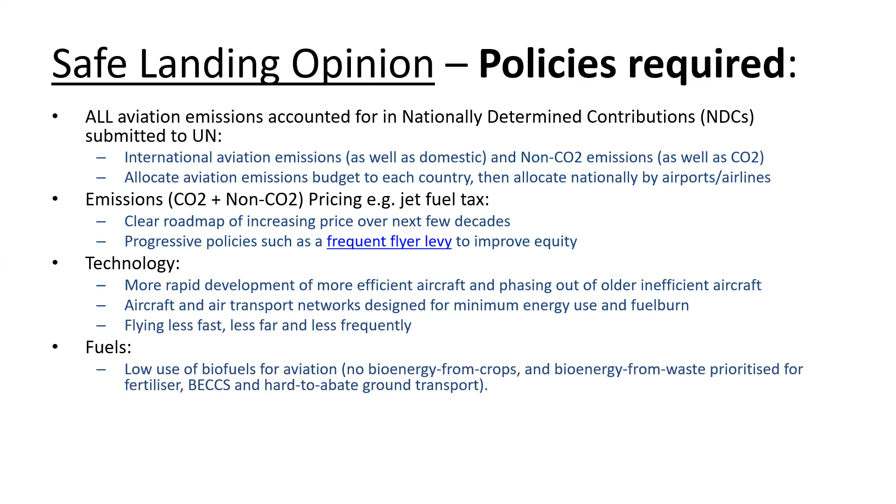Low use of e-fuel and green hydrogen for aviation probably needs to be unsubsidized, so we don't waste all our energy on that, which means e-fuels and hydrogen are going to be very high cost, and it's likely we'll have to pay a cost premium for those to discourage really inefficient energy use. So all of those things point to the cost of flying increasing. We can also improve the quality of kerosene to reduce health impacts and reduce contrails, and it's quite likely we should just do that - burn higher quality kerosene - and then pay the price for direct air capture.

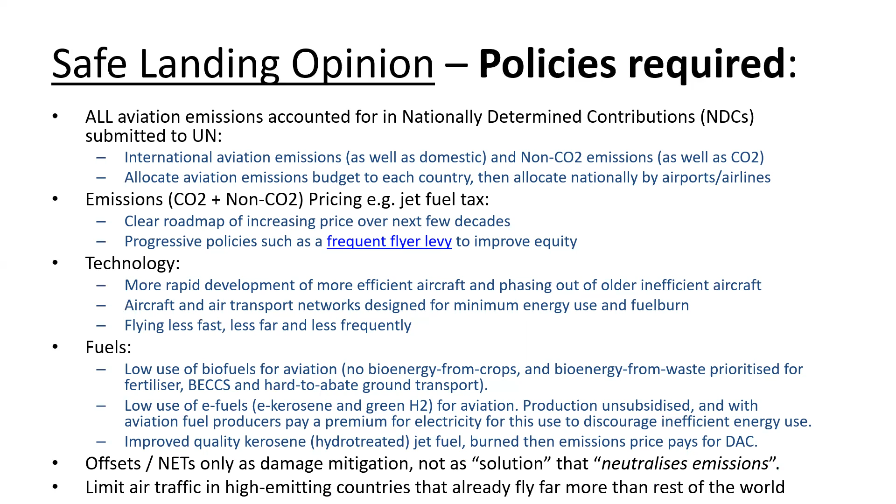Offsets should really be a mitigation, not a solution that neutralizes emissions. And we're going to need to limit air traffic in high emitting countries that already fly more than the rest of the world.

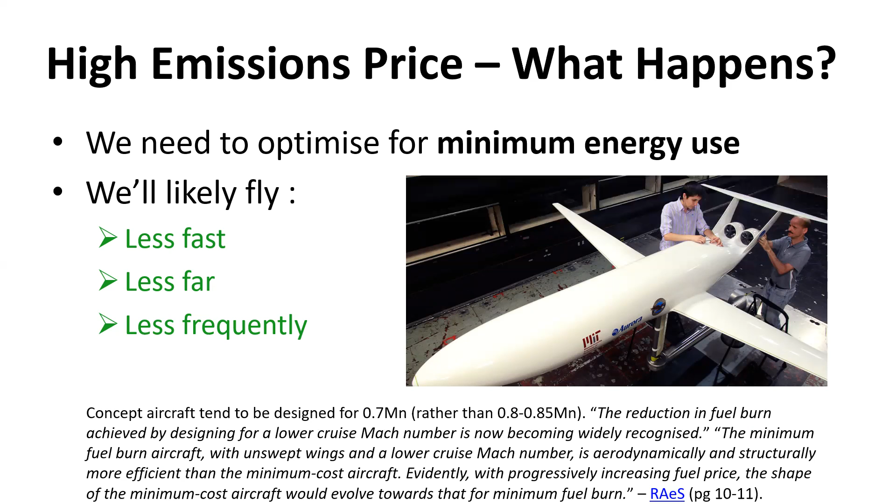This kind of thing around optimizing for minimum energy use and flying less fast, less far, and less frequently. There's been a lot of studies that show you can fly slower. And if the fuel price was higher, we would do this. We would produce more efficient aircraft designed for a lower optimum Mach number, which means we could save a significant percentage of fuel burn just from flying slower. But airlines don't really want to do that.

We think new aircraft like electric and hydrogen probably will be developed more rapidly, and that will mean aircraft will have smaller capacities and ranges because of the volume and weight of batteries and hydrogen. So maybe we need less centralized mega hub airports and more local smaller airports with a more distributed network that allows more people access to travel, but fewer frequent flyers flying really long distances and using up all of the budget. Possibly hydrogen and e-fuel production near airports, and more sustainable long-term jobs because of all this change required to transform the industry and fly these slower aircraft with fewer people in them.

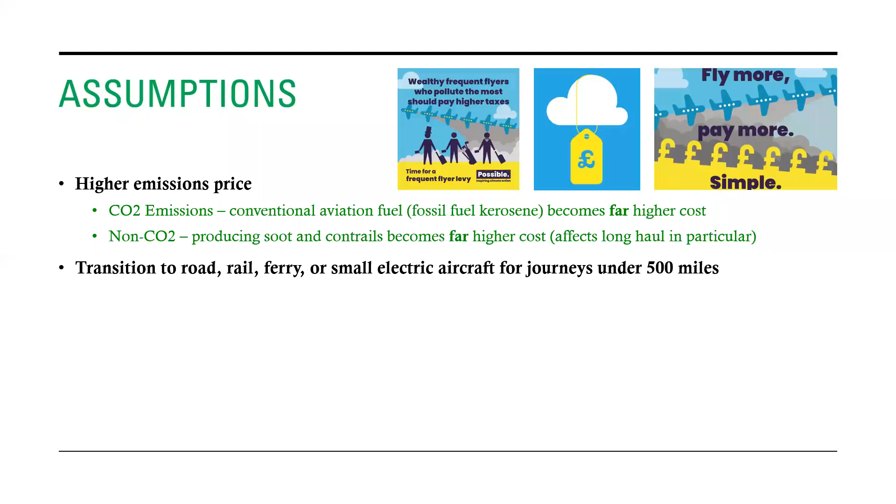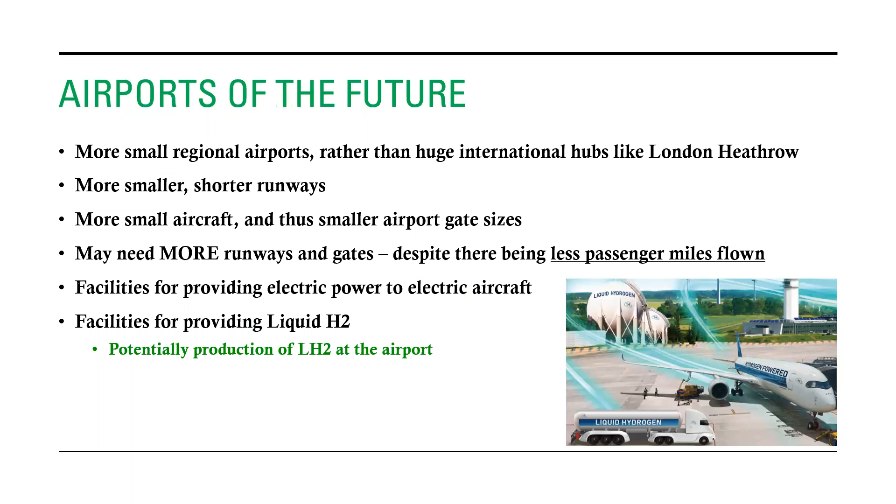I'm just thinking about the time, it's got less than 10 minutes left, so I'm going to skip through some of this, but in the pack that I share you can go through some of these assumptions in more detail. We see this modal shift happening that I was talking about. And just thinking about airports of the future being designed for different aircraft and what's going to happen with the jobs.

So the point we're making here is that fossil fuel companies' profits need to reduce, but aviation workers won't. There's lots of work to be done transforming the sector and transforming the way we travel, to fly slower and less far. So lots of work to be done.

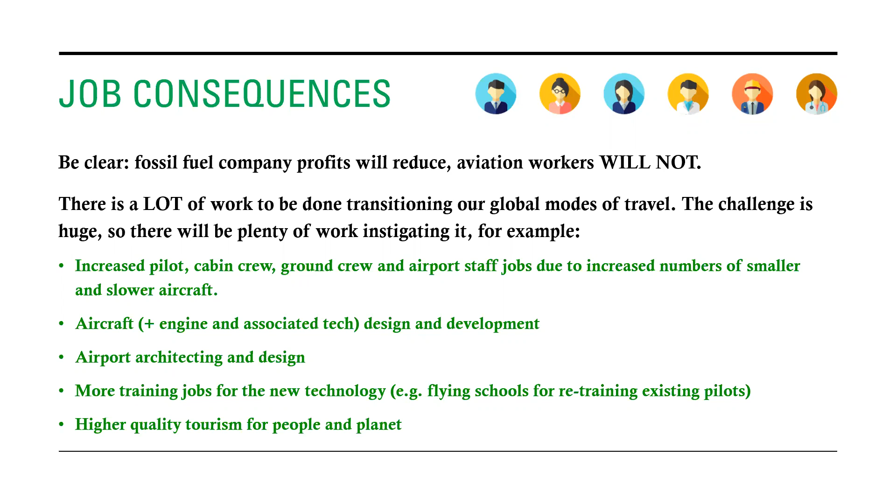The challenge is huge. So we need increased numbers of pilots, cabin crew, and so on for smaller, slower aircraft. We need to design and develop lots of new aircraft and engine technology. We need to redesign airports, and we need new training for those jobs as well. And obviously, higher quality tourism can go hand in hand with this.

Just as an example, if there are fewer long haul flights but more smaller aircraft flying shorter distances, even though air miles will be reducing, there could be a balancing effect on employment with an increased number of aircraft, but they're smaller, and the length of flights because we're flying slower. So basically there might need to be more employees. Airlines don't like that because the cost of flying goes up. That's bad for profit margins, but it's good for employment, and it's also good for limiting air transport emissions.

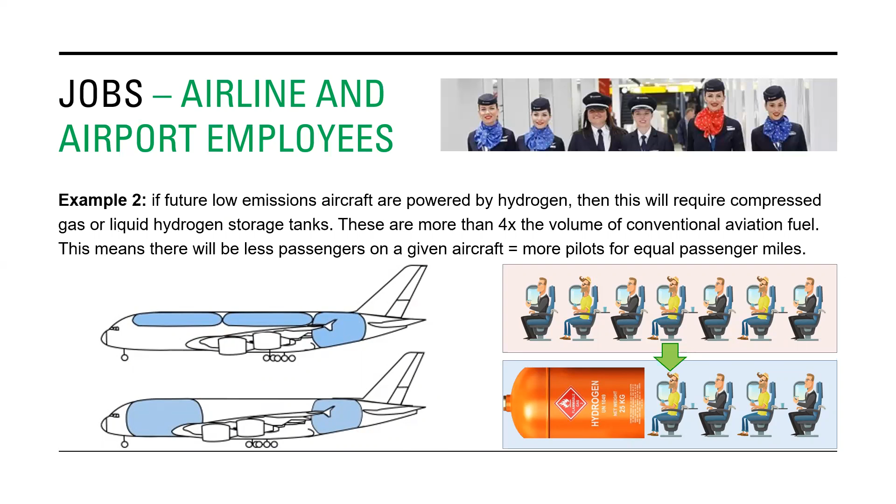Maybe we need to cut long haul flights into 2 or 3 smaller hops. But again, that means more employment time at those airports, etc. And if we need to get rid of passengers to fit in hydrogen, that means we need one pilot for fewer passengers. So to transport the same number of people, you're going to need more employment as well. So there's potential employment rebound benefits from this, along with designing new aircraft and redesigning airports.

Part of this is improving tourism, actually enabling us to still have places in the world we can travel to, so we're not going to destroy major tourist attractions like the Great Barrier Reef. Along with less traveling in terms of distance and speed, we can also think about the negative consequences of over-tourism and how we can change the way we travel and change tourism at the same time. There's a clear opportunity to both reduce negative over-tourism and improve responsible tourism, which can give positive economic, environmental, and social impacts. There are already good examples where reduced quantity of tourism can increase the quality.

So resetting aviation can help reset the tourism industry as well, we think.

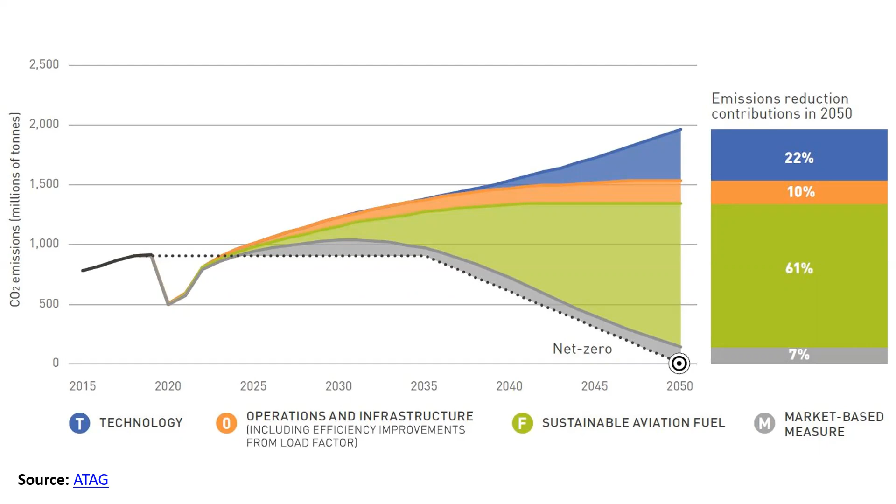Just a quick critique to finish this off on sustainability plans. This is from ATAG. You might have seen this kind of roadmap: our emissions are going to increase, but we're going to reduce those with technology, efficiency, and sustainable aviation fuel. But there's still this area under the curve of emissions going into the atmosphere.

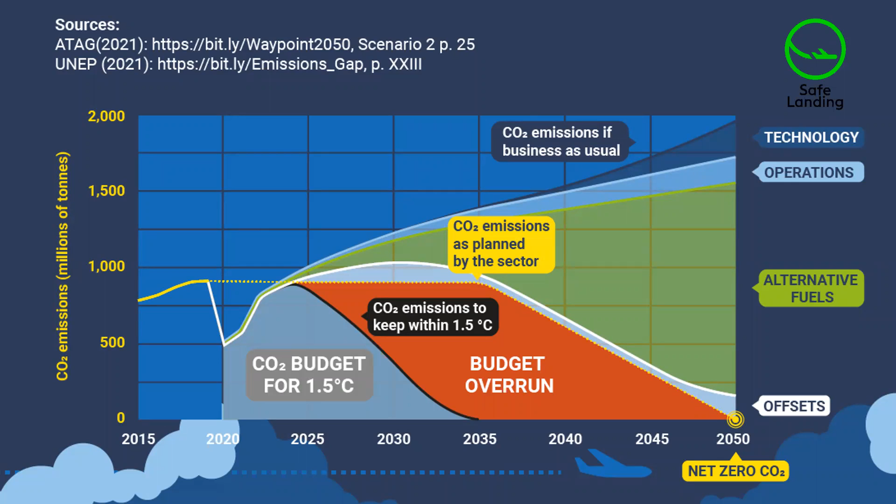If we redraw this, you can see we're going to blow our budget for 1.5 degrees C unless we reduce to zero by about the mid-2030s and go straight down there immediately. If we just continue as the industry is planning, we're going to overrun the 1.5 budget by a massive amount. What we think is going to happen in that case is flying will suddenly become a lot more expensive, there'll suddenly need to be limits on air traffic that's enforced, and this could be really bad for workers.

Think about it: we've had historic growth, then a COVID-19 crash. The industry now wants to return to the pre-COVID growth trajectory. We're saying there could then be a massive climate crash, at which point we might be able to rebuild the industry, if there's still a habitable planet to live on.

What we're saying is, how about we minimize, how about we're sensible about what we do in the short term, in order to extend that budget for as long as possible, to enable a transition that's as smooth and as planned as possible.

We've had unjust transitions in the past where industries are closed overnight and workers have to fend for themselves. We think any transition should be by early design rather than late disaster, with workers always losing out. We need to make ourselves future fit and right-sized to minimize the need for workers to transition out of the sector.

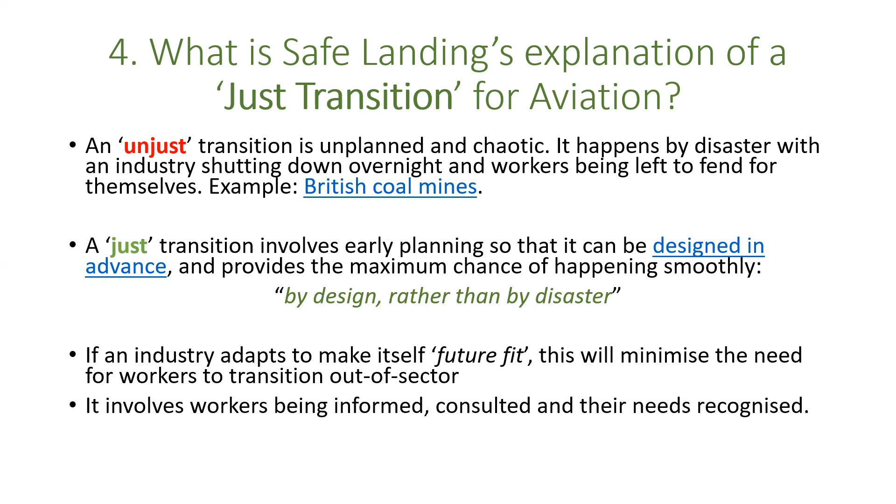If we double the number of aircraft and double the number of people to operate them, and then suddenly need to halve the number of flights, there's going to be a lot of job losses, versus if we're more careful with how we expand. We need workers being informed, consulted, and having their needs recognized, and they also need support to change.

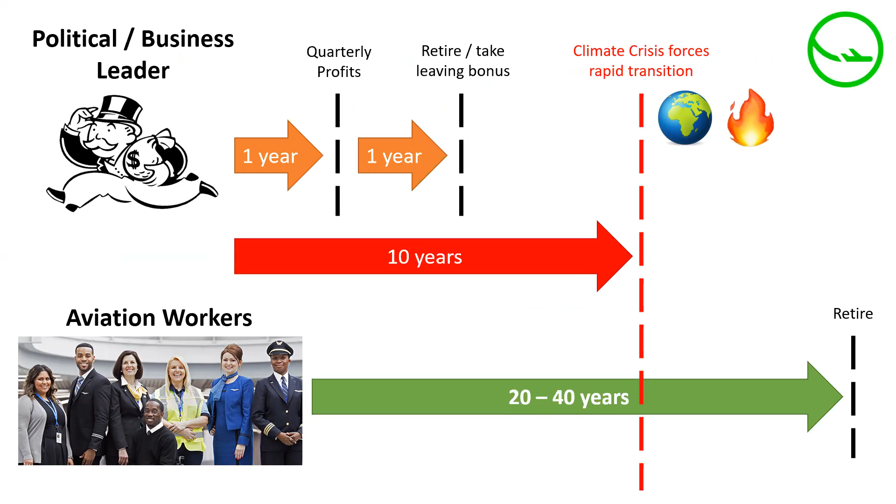The thing we're noticing though is that business leaders don't want to have this discussion. Our analysis is that in a couple of years' time, business leaders will have left the industry and taken their retirement package, but the climate crisis is a 10-year problem. Workers want to have a career for decades, so we've got a very different time horizon and very different priorities from business leaders.

What we're advocating for within Safe Landing is, some of our positions we've got based on examining the facts and looking at the evidence, but we don't want to push those positions onto trade unions. What we're really keen on aviation workers and trade unions doing is running climate assemblies, getting in experts to educate and inform themselves about these topics, and coming to consensus decisions about what they think from a worker perspective, then taking those lobby positions to their industry and to government. So we've been pushing for this Workers' Climate Assembly, we've launched a petition for that last year, and we're actively engaging trade unions on it.

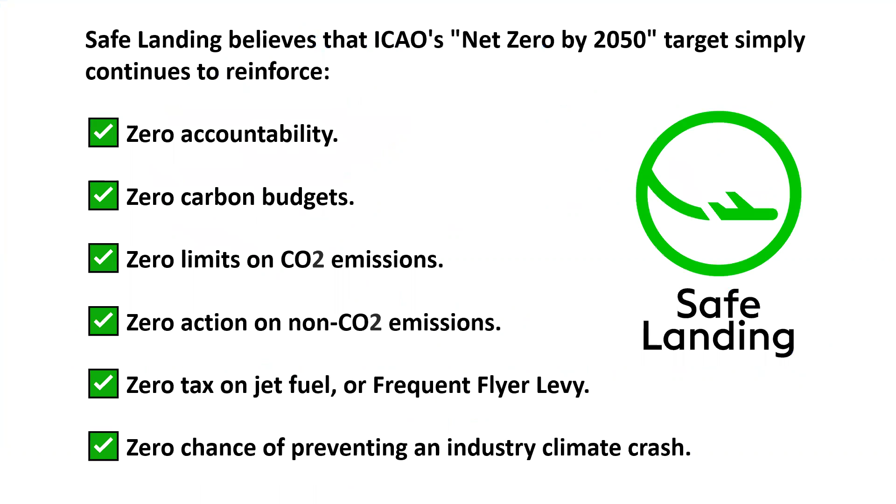I'll just skip this, this is our critique of ICAO's net zero. On worker assemblies, we've got this concept of deliberative democracy that's been used for citizens' assemblies. It's something we're really big on. You can find out more about this on our website.

What we're really looking for people to do is to create a network of aviation workers who are concerned about this across the world, who will go to their respective trade unions and advocate for this, like we're doing in the UK at the moment. So really keen for people to join us by going onto our website and filling in the form. You'll get our newsletter, links to our Telegram groups, and you can join our group activities. That's all for me.

I was asked to do about an hour, so I think I'm going to stop there and allow some questions and answers.